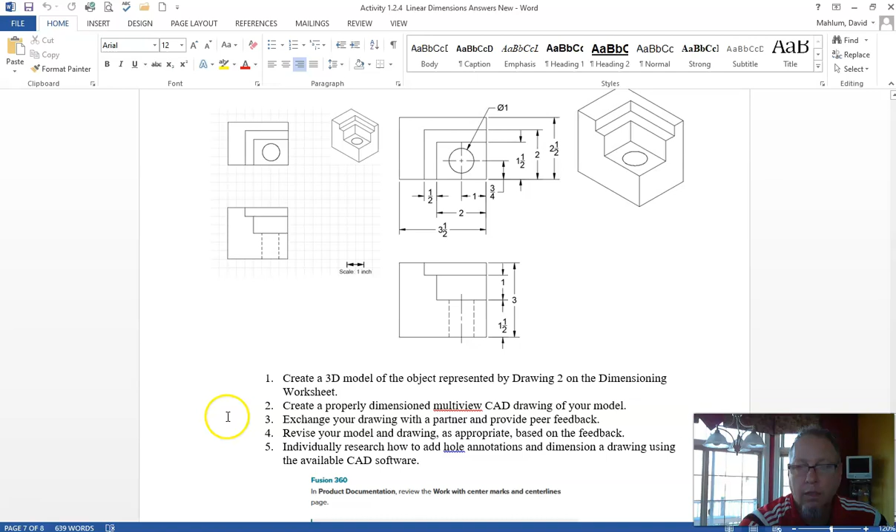All right, I'm going to give this a shot. This is drawing 3 for activity 1.2.4, where you are supposed to model this part in Fusion 360 and then place it onto a drawing sheet.

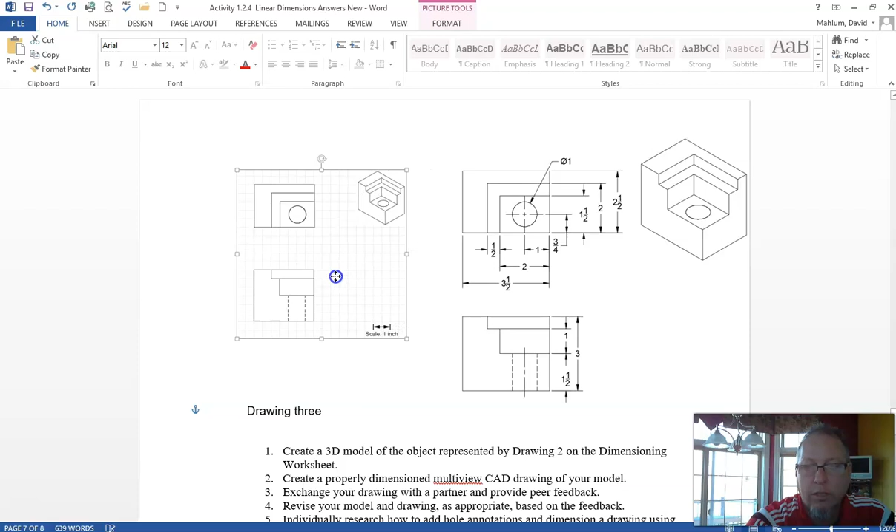Properly dimension it. The original assignment gave you only this, and you were supposed to use this grid paper to come up with what the dimensions were for it. So you have a scale, and you had to say this is 1 inch, 2 inch, 3 inch. I have that done right here, where I have the part properly dimensioned.

All I got to do is build it in Fusion 360. So the first thing I'm going to do is just make a box, kind of like what I did for the last part, and then cut away the parts that I don't need anymore.

It looks like the base of the box, actually I might do the side, is 3 inches by 3.5 inches. So it's 3 inches high by 3.5 inches wide. In Fusion 360, make sure that the first thing you're going to do is create a new component.

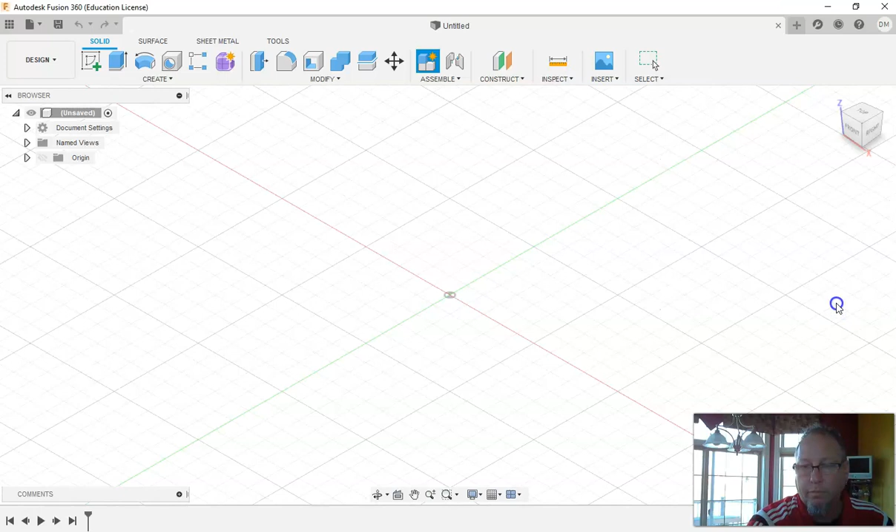I am going to call this activity, well, drawing 3, let's just go 1.2.4. Now that I've done it, I'm also going to save it. I'm going to give it the same name. And I am ready to go.

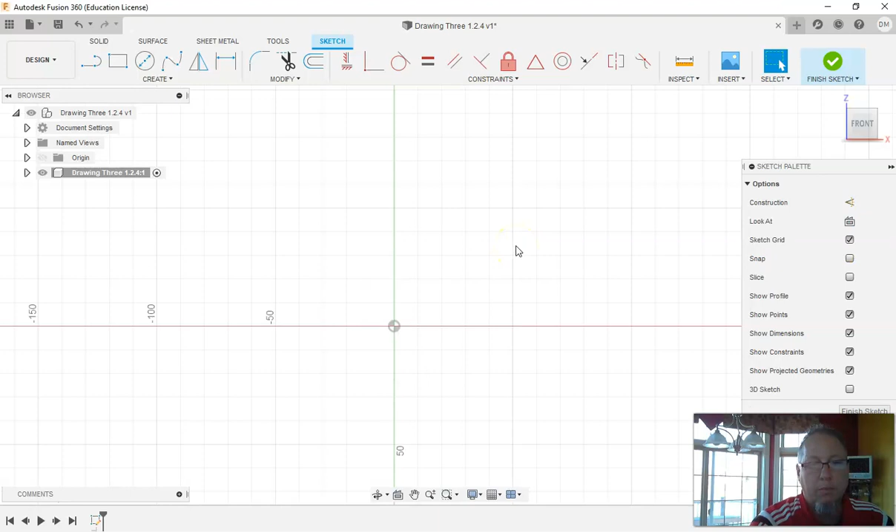So, create a new sketch. The new sketch is a box, and that box is in millimeters. I will escape and go up here to document settings and make sure that I change this to inches. Now I will make a box that is 3 inches by 3.5 inches.

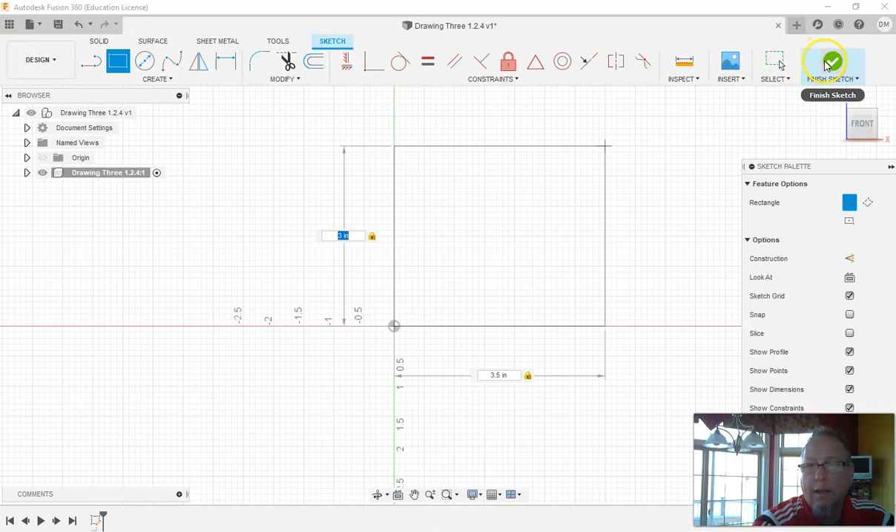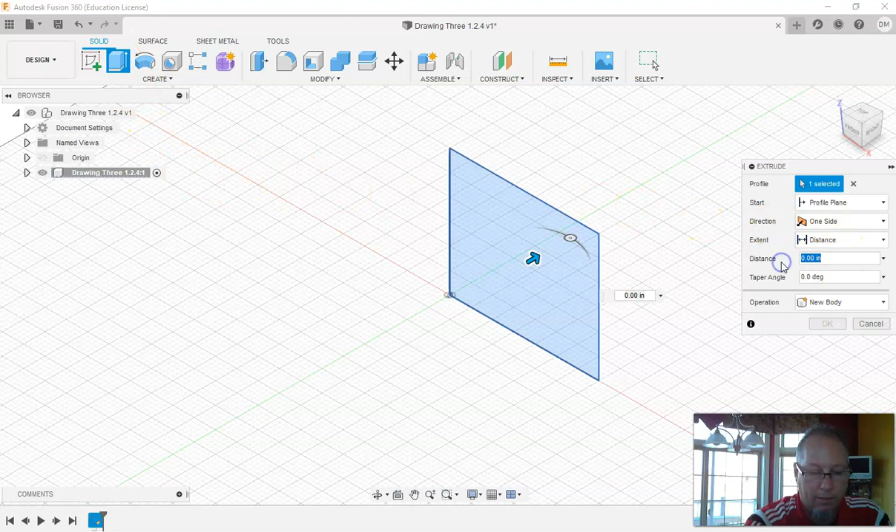Hit finish sketch. Everything is black, so I'm ready to go ahead and extrude. I'm going to check my drawing one more time. As I extrude it this way, because I had 3 by 3.5, 3 inches high by 3.5 wide, it's 2.5 for the extrusion. So click on the face, click on extrude. I'm going to have that go 2.5, and there's my basic box.

So I'm going to cut down into the box. I think from the top is going to give me the best view for this. The first thing I want to do as I cut down from the top is figure out what this is. It looks like this square, on the top view, it's 2 inches this way, and then 1.5 inches that way.

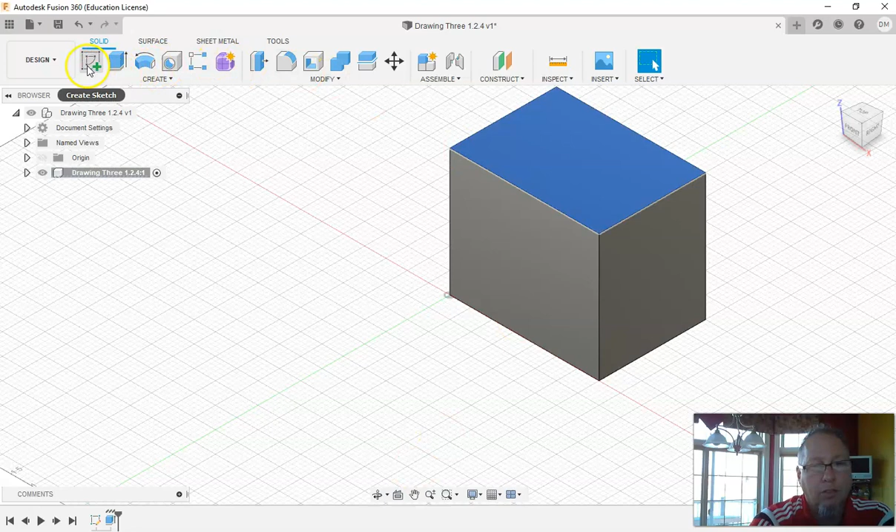So in Fusion 360, I'm going to create a drawing on the top. Create sketch. And from the top, in this corner right here, I'm going to go 1.5 for that side and 2.0 for that side. Everything's black because I started from a point that I actually knew where that was in space.

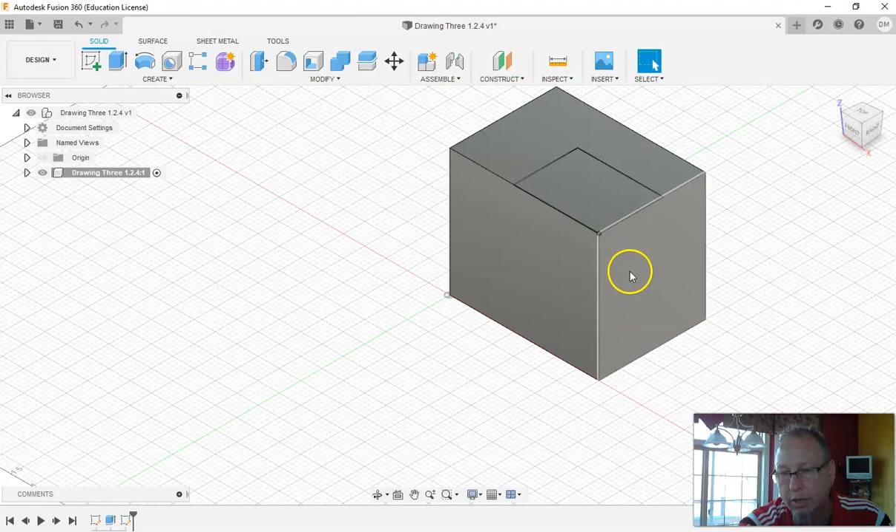Now I just got to figure out how far down to drive this cut that I'm going to do. It looks like from the top of the box down into the box, it's going to be 1.5 total. So from the bottom up to here is 1.5. So this space right here isn't dimensioned, but I can figure it out really easily.

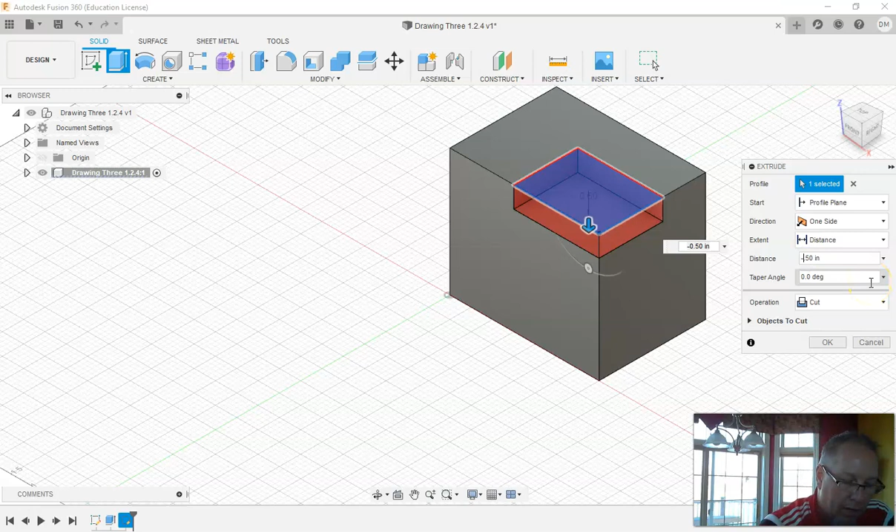So I need to go down 1.5 inches. Click on the face, hit extrude, push into my part, and I am going to do that at 1.5 inches and hit OK.

Now I have to do another cut or another extrusion. So I'm going to once again create this on the top of my box. I'm going to hit OK right there and go up and create a new drawing, and it's going to spin my box around. If I look at what I want to do now, I want to create this little ledge.

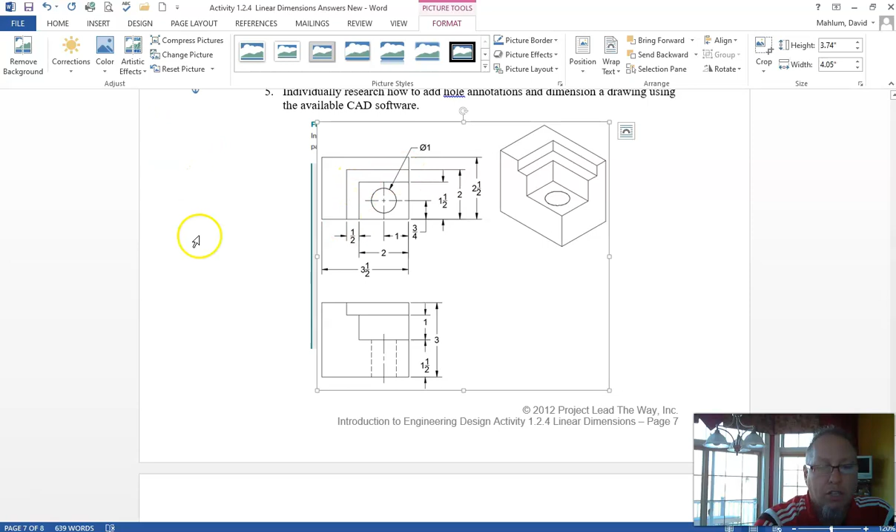So to create that little ledge, it looks like, what do we got from down here? It's going to be up to 2, and it's a 1/2 inch kind of little L shape there. So a 1/2 inch L shape. I'm going to draw that this way, I think, in Fusion 360. I'm going to use the line tool in this case.

I'm going to start there, and I'm going to put a line all the way over there. I'm going to hit escape. I'm going to use the line tool again, and I'm just going to start down here, and go all the way up there. So I'm not being really very precise with my lines at all.

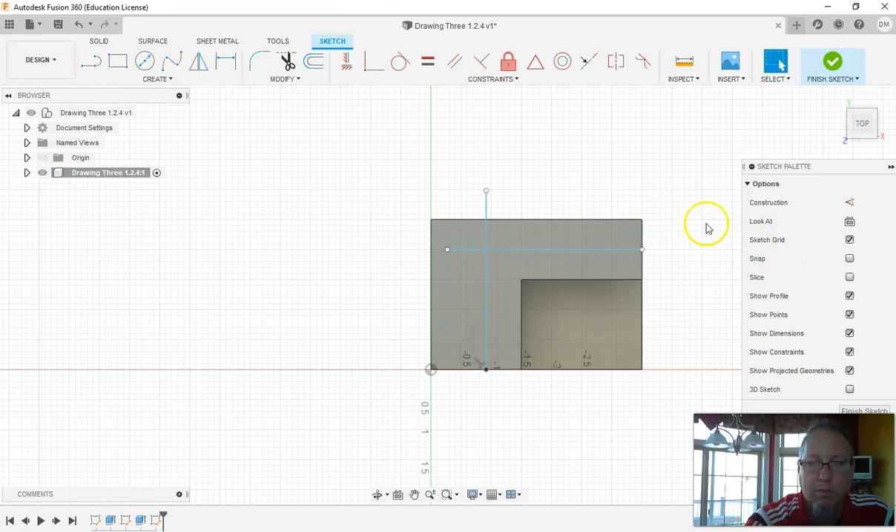It looks like some kind of constraint was put in here. I don't think I want those, so I'm going to delete them. And I don't really want that constraint either, so I'm going to delete it, because sometimes it puts in constraints automatically. To make my 1/2 inch ledge, I'm going to go there. Oh, that was already 1/2 inch. That was perfect. And I'm going to dimension this way the same way.

0.5. And then I'm just going to trim.

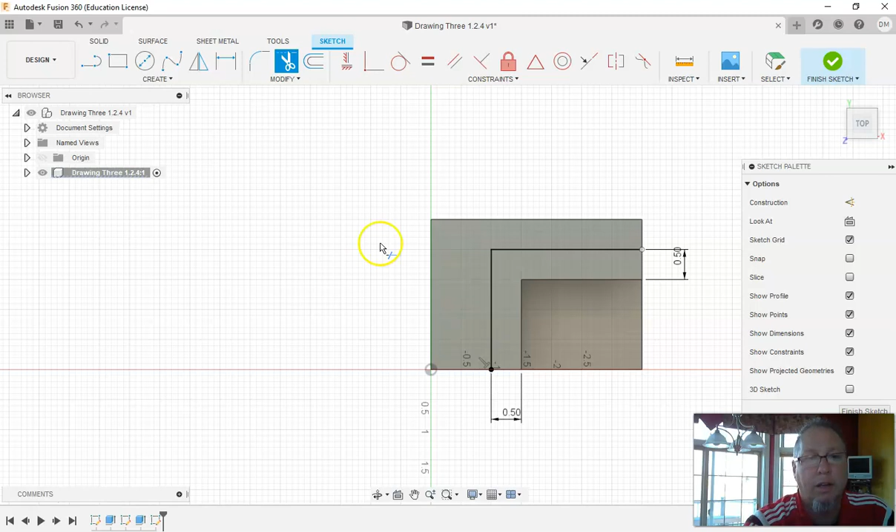And then I got to make sure that I close this shape, because if I don't close the shape, I'm not going to be able to cut down what I want to cut down. So to close the shape, I'm just going to go and put the rest of these lines in, which, because I'm starting with geometry that I know, all of those lines went in as black lines, because it has everything it needs to know where those are in space.

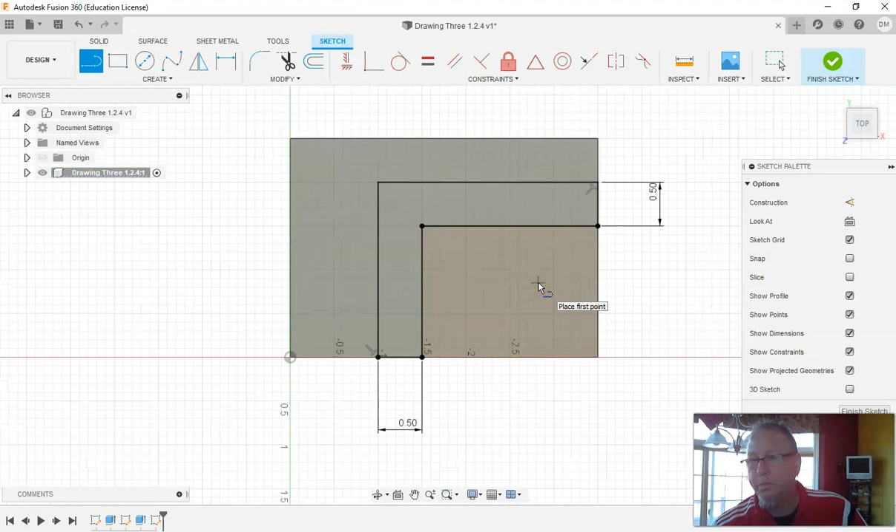Some other automatic constraints applied. I'm just going to leave those. Hit finish my sketch. Now you can see what that sketch looks like, and I just need to know how far down into the part to cut that, and it goes down into the part a half inch.

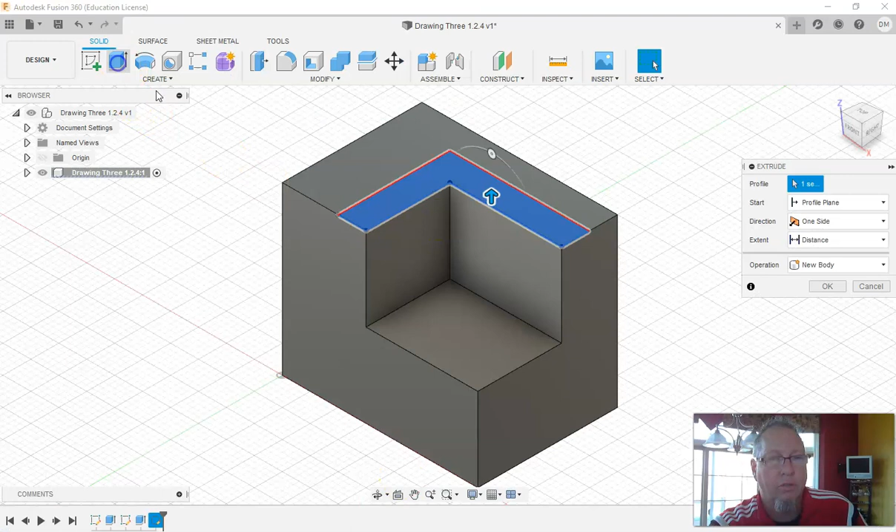So in Fusion 360, I'm going to highlight what I want to extrude. I'm going to hit the extrude button, go down in, and it goes down into my part half inch. So I'm well on my way.

The only thing I have left to do is to put that circle in, and the circle is 1 inch in diameter, and it looks like it's right in the middle on this side. See how this is 1 inch out of 2, and right in the middle on that side.

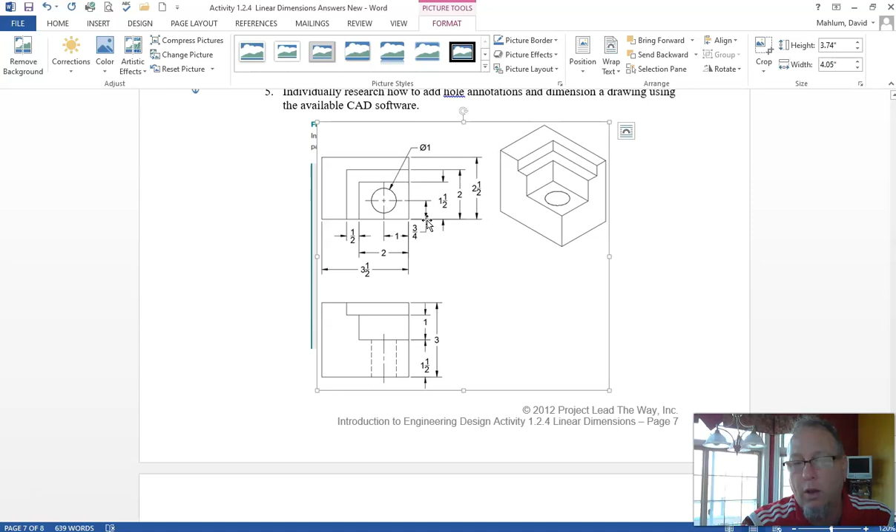So there's a really quick way you can do that when you're doing a circle. It's a really nice feature that they put in there. So I'm going to click here and say that I want to do a new sketch. And it's called scrubbing on the line.

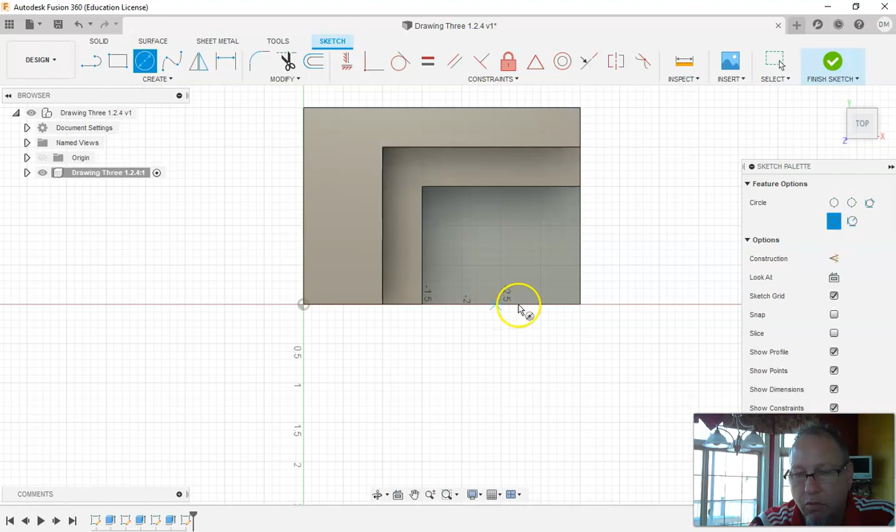So I'm going to grab my circle, but before I start drawing my circle in, I'm going to go up here, or I could go down here, and I'm going to scrub out. See how I'm just rubbing on the line? And then I'm going to go into the part, and I'm going to go over here, and I'm going to rub up and down on this.

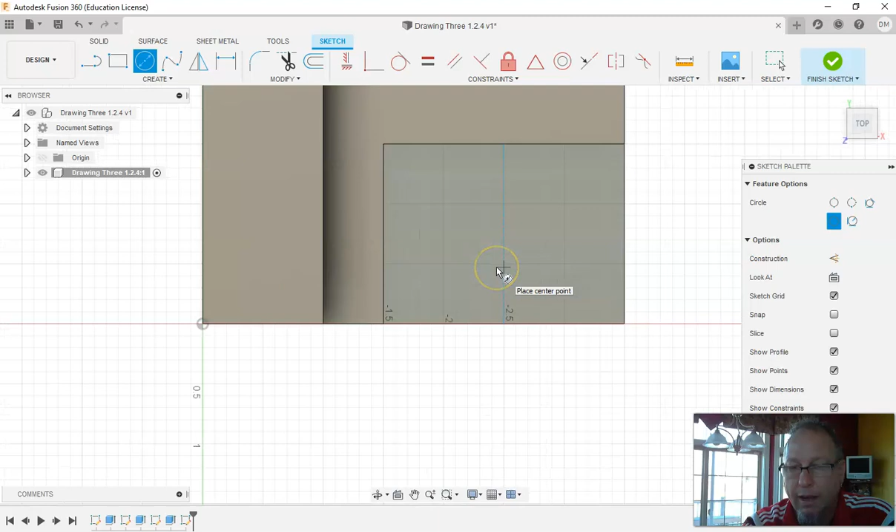And now that I've done that, I've told it that I wanted to use those two lines to help me reference where my circle goes. So if I move in, I'll get to a spot where it snaps to place. And it's hard to see, but there's a little blue line that shows up. That's the center point of that line.

And if I move up, I get to another spot where it snaps to a spot. That's the center point of this line. So when I get both snaps, that's the center point. And then I clicked, and it said 1.0.

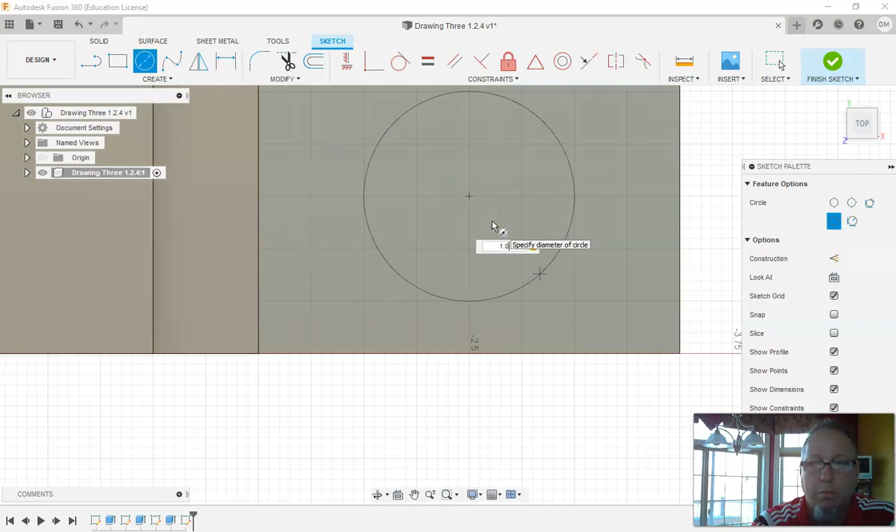Now, this should be a fully dimensioned circle when I'm done. It still shows up that it's blue, which is okay. That just means I'm going to have to give it some dimensions. So ideally, it should know where those are, but sometimes it doesn't.

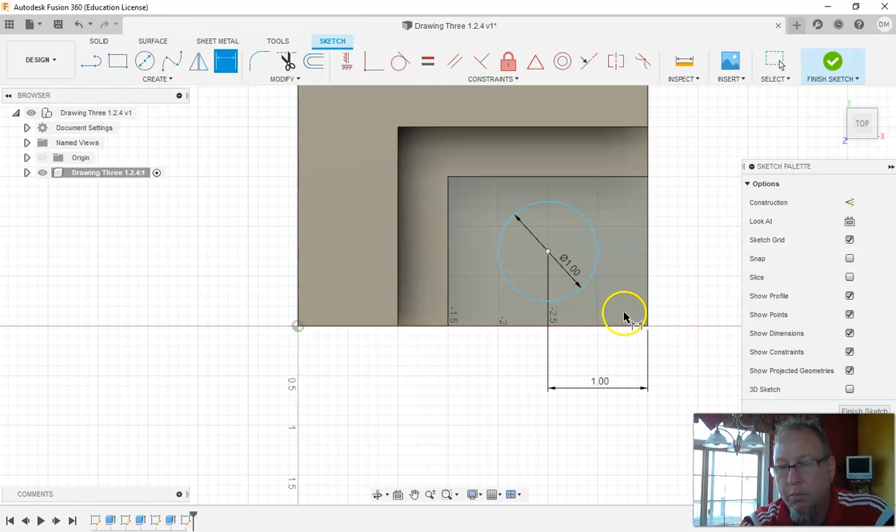So I'm just going to put the dimensions in. I already knew that that was 1 because I used the center point that way. And I'm just going to dimension it from this line up as well. And that should be 0.75. That's exactly what was in the drawing. And by scrubbing on the lines, it helped me find that really quickly and easily.

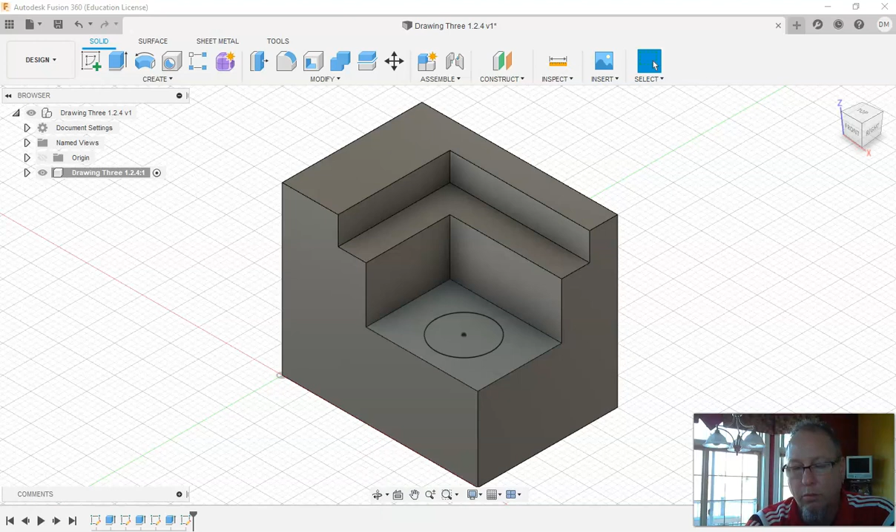So there we go. Got my sketch done. Let's see if that goes all the way through the part. And I can see over here it does go all the way through the part.

So in Fusion 360, click on that little circle. I'm going to go up here to extrude. I'm going to make it go in. And I'm not going to put a distance. I'm just going to say cut all the way through. Okay, and my part is now done.

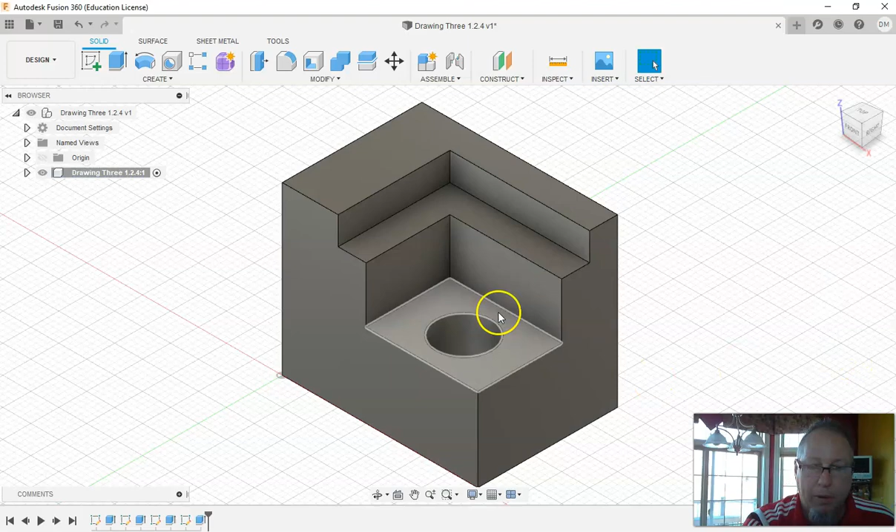And I am ready to put that onto a drawing sheet. So I'm going to make sure I hit save. And then up here under the File menu, go down to New Drawing. From Design, click. When it opened up this dialog box, it did not find my template. I don't know why. That's okay.

So where it says template, I'm going to click, and I need to use one of the title blocks that I've created previously. If you don't know where that is, you're going to have to browse for it, but I'm going to select Project Lead the Way title block, hit OK.

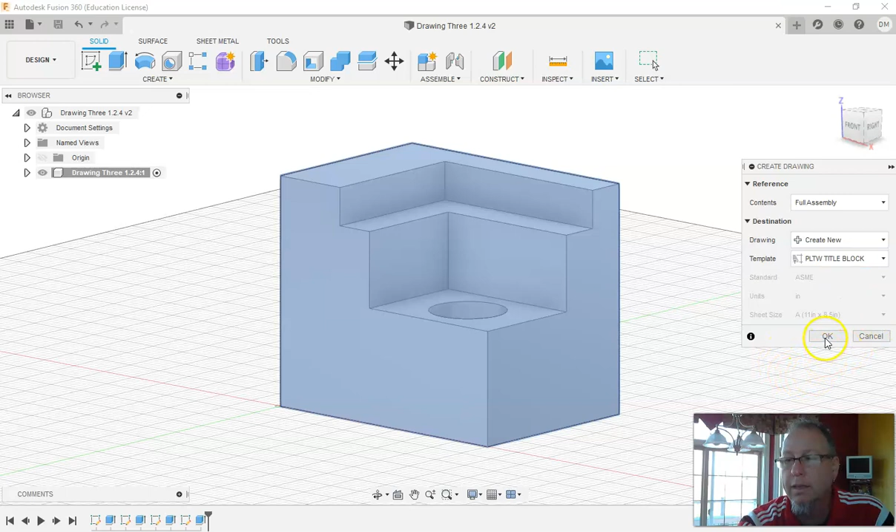And here's my part on a title block page. When I just hover over, it's going to automatically give me the front view. It chooses a scale that it thinks is appropriate for the page. I am not going to change that scale, but I am going to click the second icon.

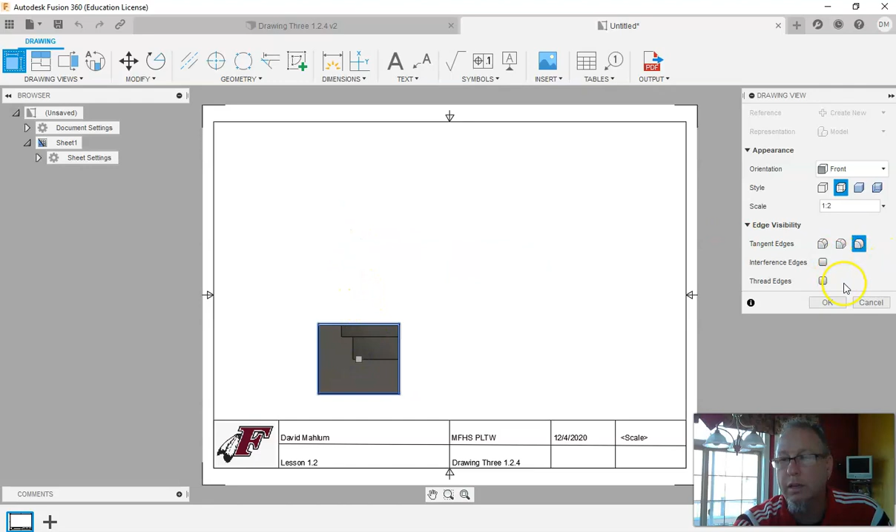Click, go up, oops, sorry, hit OK. And now my object is placed. Click on the object, right click, projected view. I'm going to go up and place that view. And I'm going to give myself an isometric over here.

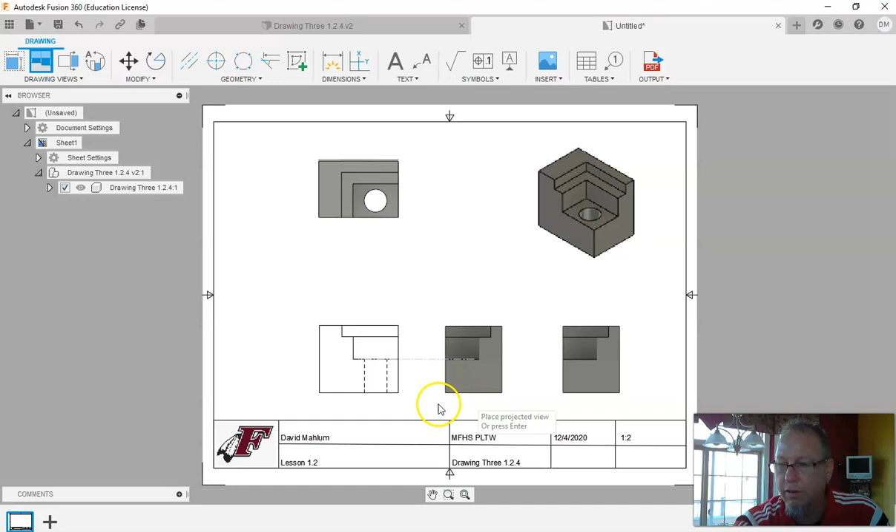Click, place that view. And just to show you that I can, I'm going to put the right view in. I don't think I need it for anything, but I'm going to drop it in there. I hit escape to get out of that menu where I was dropping my views and everything becomes wireframe and hidden lines. Double click this picture, change it into a solid object, and hit close because we like the isometric to be solid.

So I just need to dimension this so that somebody else could indeed dimension this if they needed to. Any place where you can see the whole face, you put the hole center mark in. So I click on hole center mark, hover over the edge of my hole, and click.

If it's a hidden line hole, we're going to put the center line in. I'll click on center line, click on one side of it, click on the other side, and the center line goes in automatically.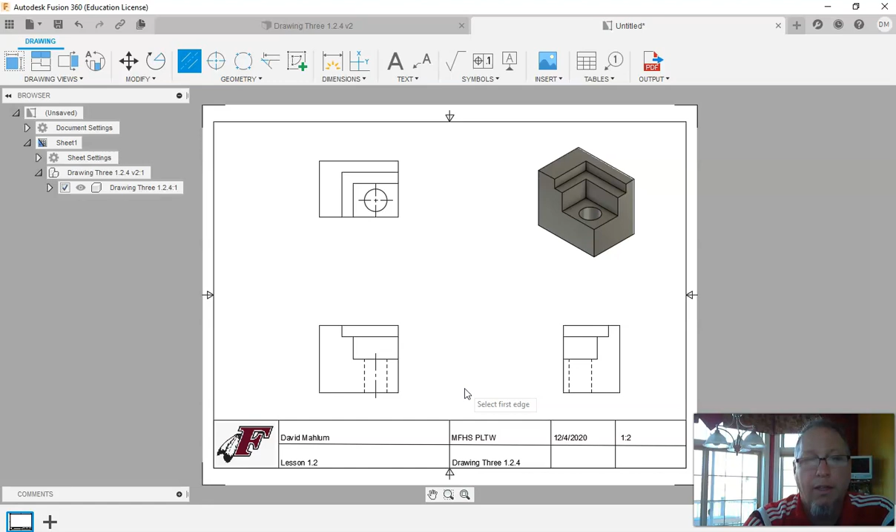At this point, I just need to start dimensioning the three shapes. I usually do length, width, and height first, and once you have those in, you don't need to put them on any other view. So I'm going to click on the little box that says dimension.

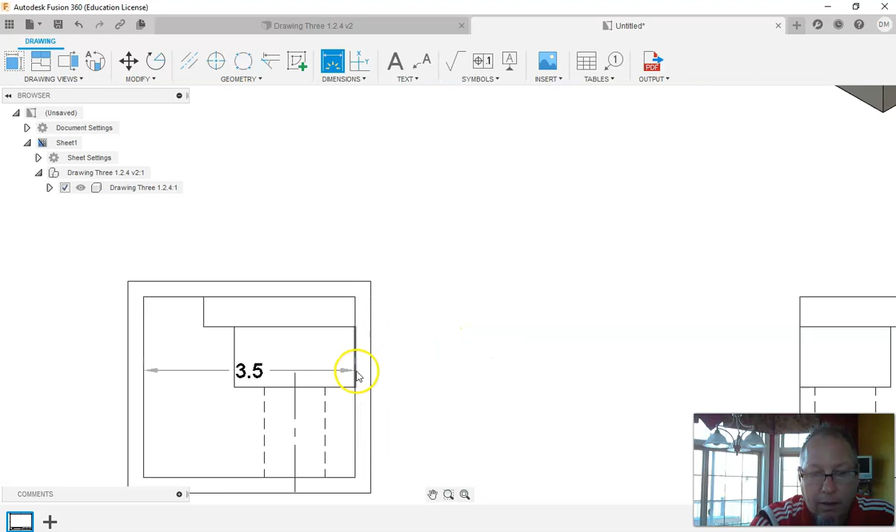Oh, did not mean to get that line. I'm going to do my length by clicking here, going all the way across, and clicking here. And that is, whoa, don't move that around, 3.5.

And then I'm going to go up here to dimension, and I'm going to click on the top line, click on the bottom line, and that is 3.

A couple of important features I would need to know where they are. I need to know where these steps are as I'm creating them. Keep in mind you always work with your largest dimensions first. So I'm going to click on the dimensioning tool and get that step and put it in.

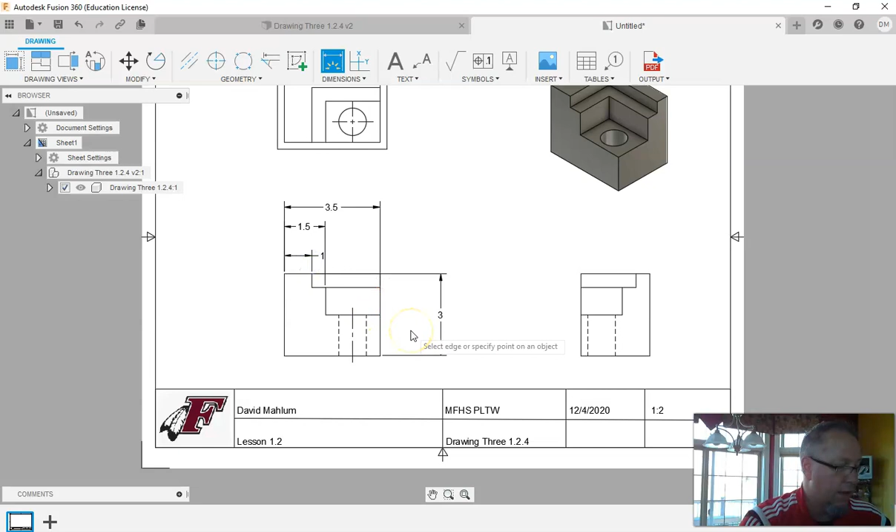I still need to know where this step is. This is the best view to dimension these, so I'm going to put the one in there. I'm just going to take this little number 1, click on it, and drag it so it's in between, because that will look nicer. I can drag these other ones down so they look a bit nicer in the drawing view. There we go.

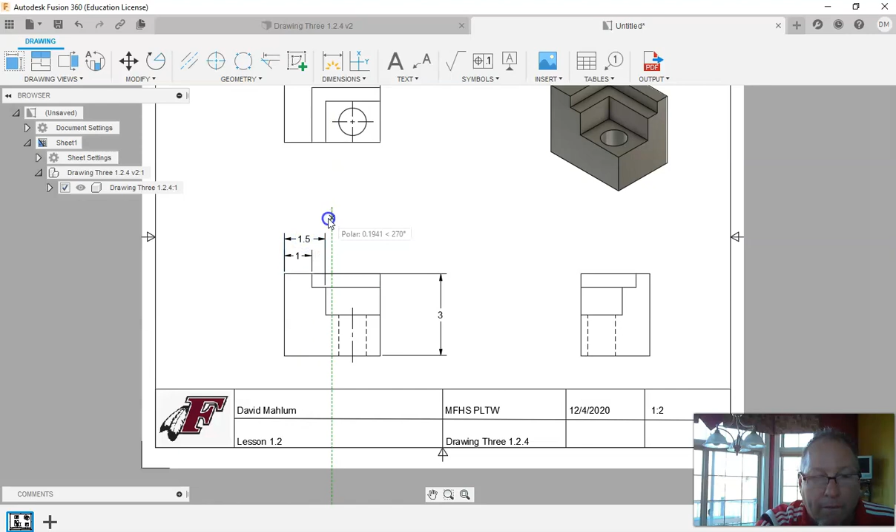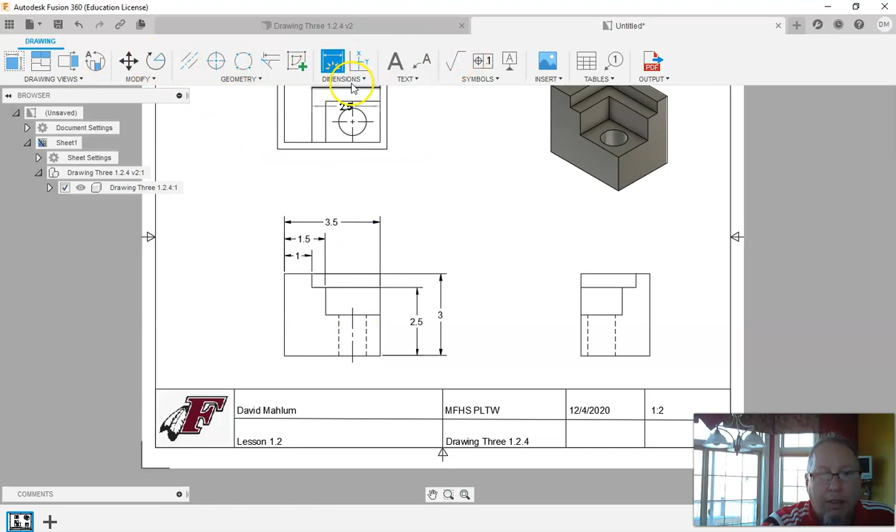Same thing on the other side. Notice I'm putting my dimensions in between the diagrams. Over here on the other side, I'm going to click on the bottom, go all the way up, because your biggest dimension should be furthest away. I need one more dimension in there for somebody to be able to do this on their own, so I'll click down there and click on that line, and there you go.

Since we're learning about dimensioning, one of the things I did on purpose is break a dimensioning rule: I have dimension lines that are crossing, which can be confusing. Since this is a fairly simple part, you could probably get away with it, but technically, instead of dimensioning these steps here, I should do it over here.

If I take those same things and do it on this part, I won't have my dimension lines crossing, and it'll look a bit nicer overall. I'm going to pause while I do that, and you can see the difference in just a second. So instead of dimensioning the contour here, I did it there.

I can just click on this and hit delete. Click on this and hit delete. Now my part just got a lot cleaner for showing somebody how to make the part.

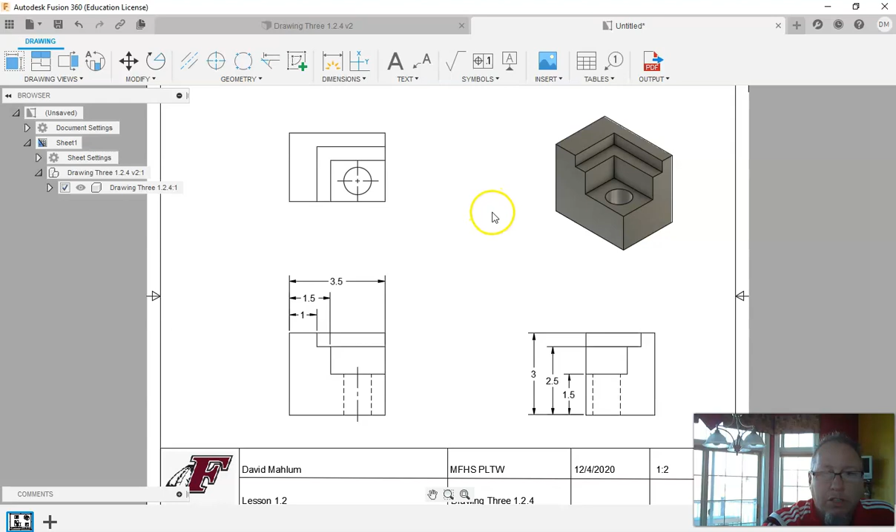I also need a couple of dimensions up here. I need to know where the hole is and the width yet. So I'm going to dimension that width first. Keep in mind that this is considered the in-between space this way.

Then to get that hole, I am going to click on that leader line and the bottom, boom. Click on this and that leader line, and boom. If you don't like those 0.75s being in between or on the outside, you can drag them up to put them in between, like so, and I can move that one over like so.

I do need the diameter of the circle, and the best spot to probably put that, making sure I'm dimensioning correctly, is to drag it down this way. Seems good right there. I am going to double click that one.

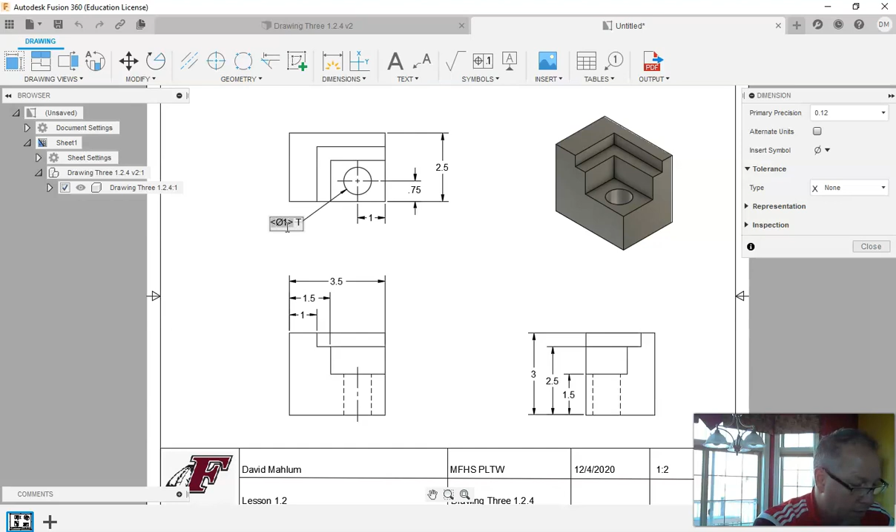Hit escape to get out of the dimensioning tool. Double click, space, through. That way it shows up as a through hole, so somebody else knows that hole is going all the way through.

There are a couple other dimensions I could add to help with the steps here so people know where those are. I'm just going to put those in up here on this view. We would need to know this, so I'll drop that one out there, and I need to know this other step is only 1/2 inch.

Keep in mind you always have your smallest closest, so I'm actually going to move this one out a little bit even though it's a hole, just to follow through with the guidelines. Holes kind of get their own designation, but I'm still following the general pattern of dimensioning, where the smallest numbers are closest and the largest numbers are further away.

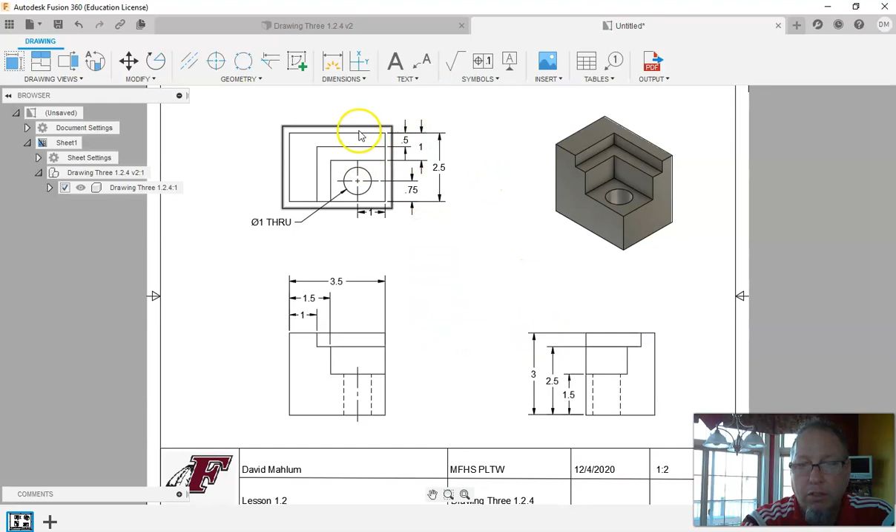Somebody could make this part now, understanding all the different dimensions and knowing where everything's at. So good luck making the part. Take a snip of this, put it into a PDF file, and submit it on Schoology.